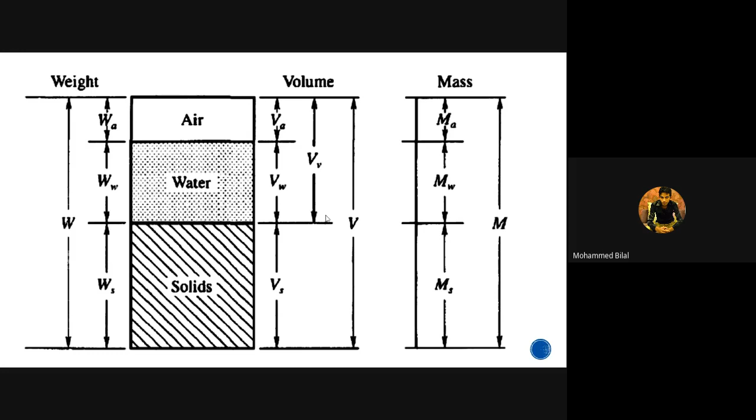So we have derived a few interrelationships between the base properties also. The base properties in the sense which we directly derive from the phase diagram, and the interrelationship means the derivations or the formulas which are derived using two or more base properties. So that is called as interrelationships. So we have derived some interrelationships also.

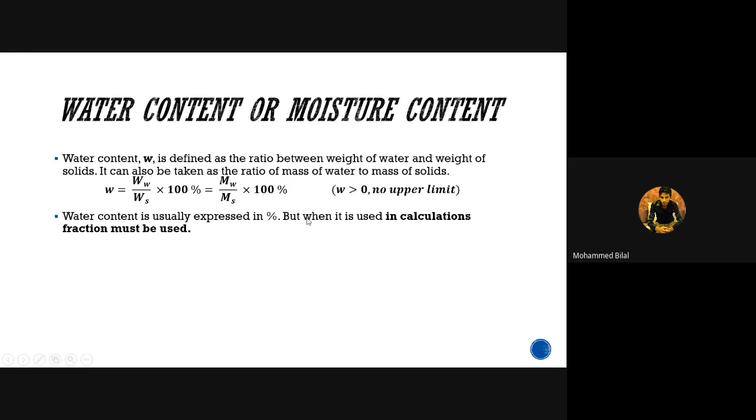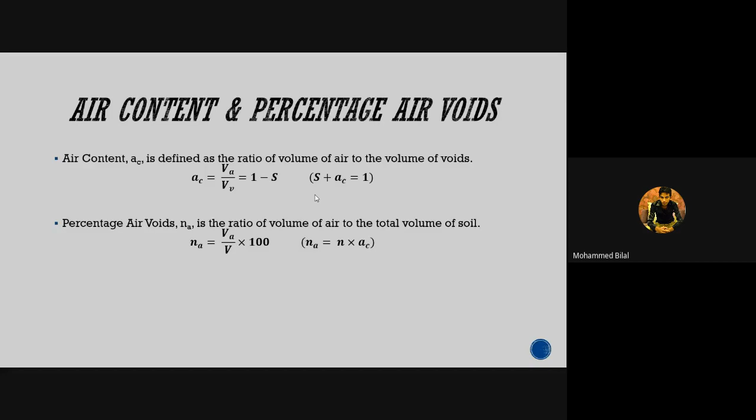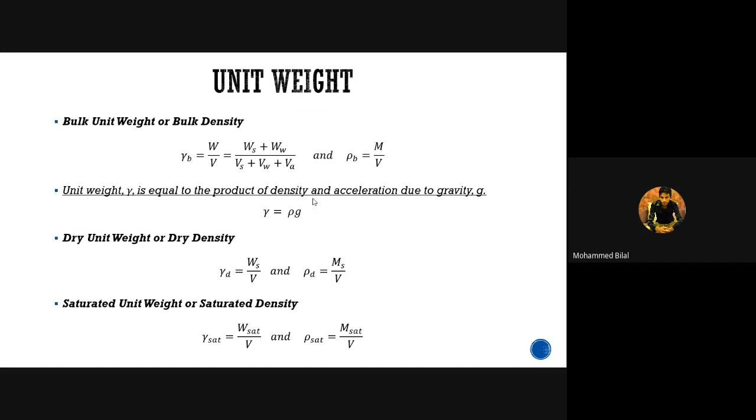So the base properties which we were discussing were water content, void ratio, porosity, degree of saturation, air content, percentage air voids. All these fall under the volumetric relationships category. And the rest we saw the weight relationships or mass relationship category. In that we saw the unit weight: bulk, dry, saturated, submerged, and finally the density of solids.

So the first four represent the unit weights of a soil mass at different conditions. And the last one, this unit weight or density of solids, represents the unit weight of the solid particle alone. So we are not considering the weight of the water and air present in this density of solids property. So please be clear with the difference between these properties.

Bilal sir, your voice is breaking, sir. Okay, sir. One sec. Sir, can you hear me now? Hello? Yes, sir. Students, all of you clear with sir's voice? Yes, sir. Okay, thank you. You can start, sir. Okay, sir, sure. If you have any difficulty in the voice clarity or anything, please stop me there and intimate me. Then only I can check. Okay, thank you. So let's proceed again.

So one thing we have to be cautious about this unit weight is for any other material, say for example, we take concrete or steel or water or mercury, these are the common materials we discuss. You may have come across them during your previous semesters. When we take fluid mechanics, you could have discussed the unit weights of water, oil, and mercury. In fluid mechanics lab, we usually use mercury. That's why I included that here, even though it is not a construction material.

We have seen some important interrelationships between different properties, and where we have utilized these properties. Now we can move on to the next problem, some other types of problems in this topic. In the previous class, we saw a problem where a soil's weight in wet and dry condition was given, and the volume was given, and we calculated these many properties in that sum.

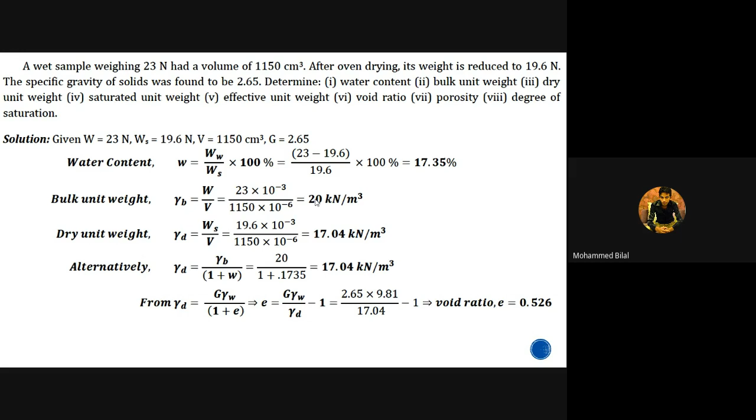Don't expect that the property name will be given in the question. Sometimes it may be given with only the symbols of the property. So small w represents water content or moisture content, both are same. Don't get confused that w may be representing weight; it's not like that. So small w represents water content here, 14.6%.

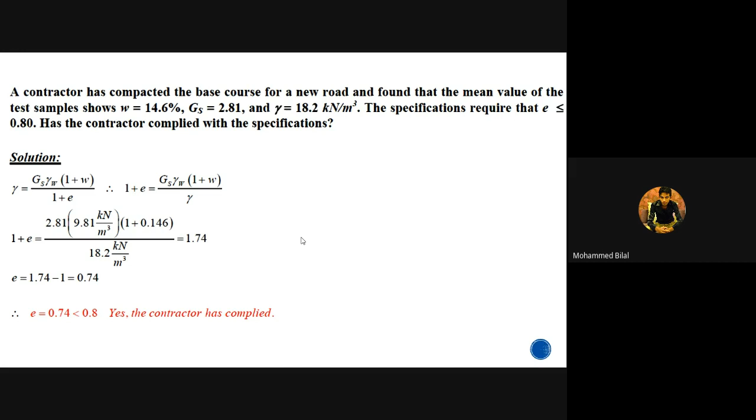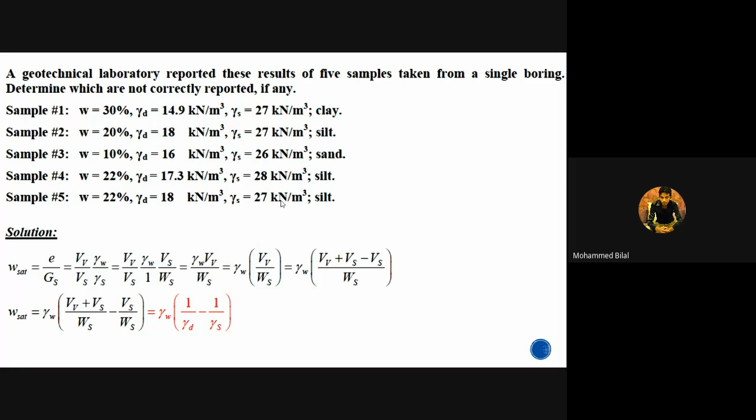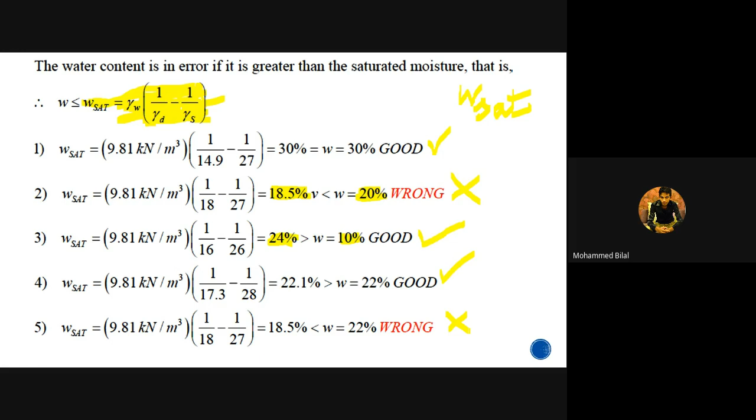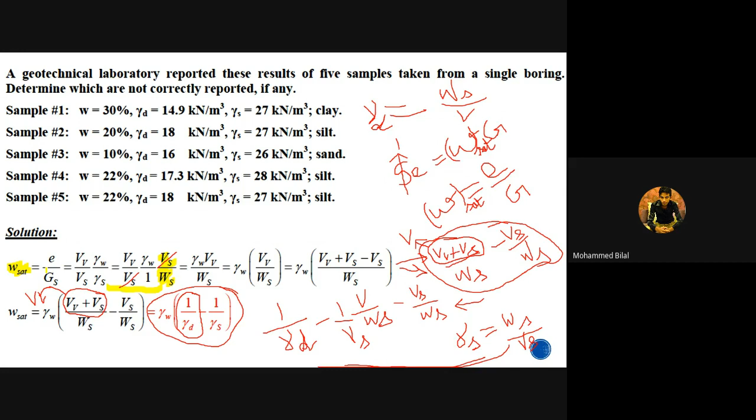So don't expect that in the first unit or in the phase relationship chapter we are having 25 formulas, and if I mug up these 25, I can answer any sum. Don't think like that. In this particular sum, you have seen that we are deriving a very new term here, water content at its saturation state. Sometimes you can get problems like this. That is the difficulty level of GATE exams or UPSC exams for that matter. Okay, right. Let's move on to the next one.

We have got so many questions in this particular sum. So much data is given, and we are asked to solve so many properties here too. So let's write it one by one. We are separating the given data into two portions. We are dealing with this sum in two different locations. Location one is the borrow pit, from where we are collecting the soil to build this embankment, and location two is our construction site, where we are going to construct this particular embankment.

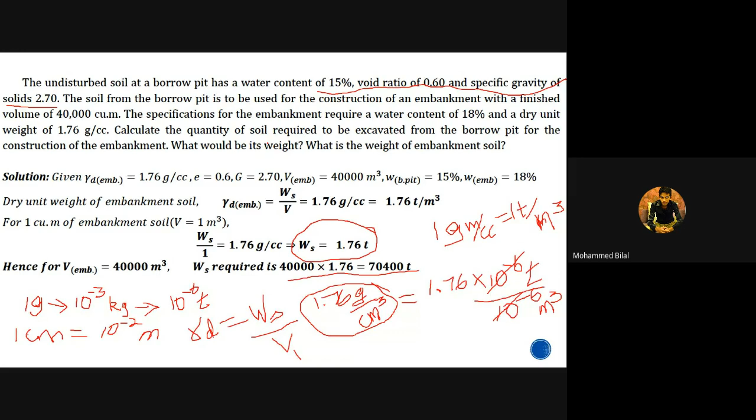So the dry unit weight of the soil in the borrow pit is not directly given. We have to calculate that first. Other properties of the borrow pit were given in the question: the water content of the soil at the borrow pit, the specific gravity of solids, and the void ratio. You can note that here in the question. The unit weight of soil in the borrow pit was not directly given, and hence we are calculating that first.

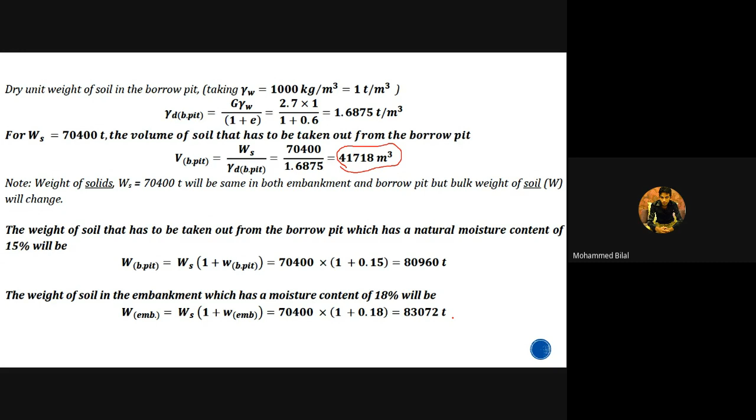Next, we are moving on to the next topic. If you have any doubts in the previous phase relationship topic, you can ask, or else we can move to the next topic. Okay, next topic, index properties of the soil.

Okay, so if we calculate or if we find any value or any property of a material, there has to be a purpose for that. Why we need to do it? Why we need to calculate unit weight? Why we need to calculate void ratio? There has to be a purpose for that. Similarly, index properties of soil, and we are going to discuss a few properties of soil in the next few slides, and we are going to collectively call those properties as index properties.

Why the name index? You can see in our record notebook or in a textbook, we have index in the beginning of the book. So what is the purpose of it? Index helps us to locate the content of the book or identify the content of the book, where it is. Similarly here, this bunch of properties which we are going to discuss in the next few slides,

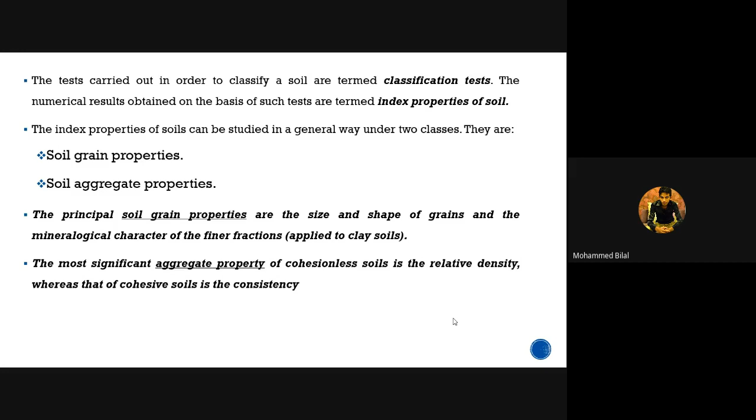So the most significant aggregate property for cohesionless soil is its relative density. So far, we have discussed bulk density, dry density, saturated density, submerged density, and all. And this is one new term, relative density, so we will discuss what it is. And for a cohesive soil, the most important aggregate property is its consistency. In the next slides, we are going to see all these properties.

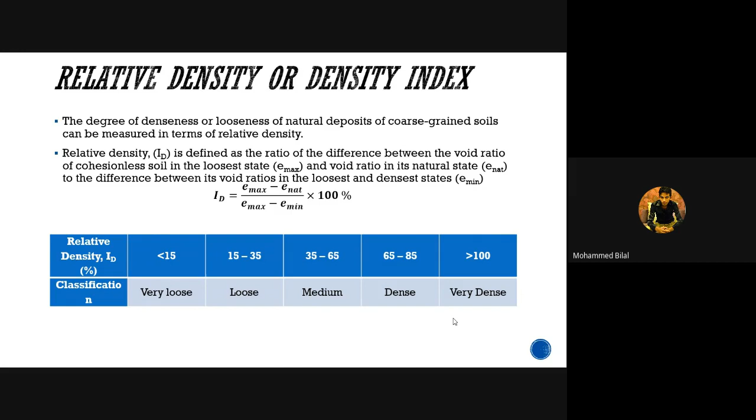From the relative density results, we can classify the soil into 5 categories. If the value is less than 15, it is very loose soil. 15 to 35 is loose soil. 35 to 65 is medium. 65 to 85 is dense, and 85 to 100 is very dense.

Next, for cohesive soil the main aggregate property is consistency. The consistency of clay soil can be measured using the Atterberg limits. Consistency is a term used to describe the degree of firmness of a soil in a qualitative manner, not a quantitative manner, using descriptions such as soft, medium, firm, stiff, hard, etc.

Okay, right. So what this literally means is with how much ease, or simply how easily we can deform a clay soil. We are given a block of clay soil: how easily can we deform it, change its shape? Using terms like soft, medium, and firm, we can indicate it qualitatively. So that is what we are going to do in consistency.

The physical properties of clays are considerably influenced by the amount of water present in them. So depending upon the water content, 4 states of consistency can be used to describe the consistency: liquid state, plastic state, semi-solid state, and solid state. In between these 4 states, we have 3 boundaries.

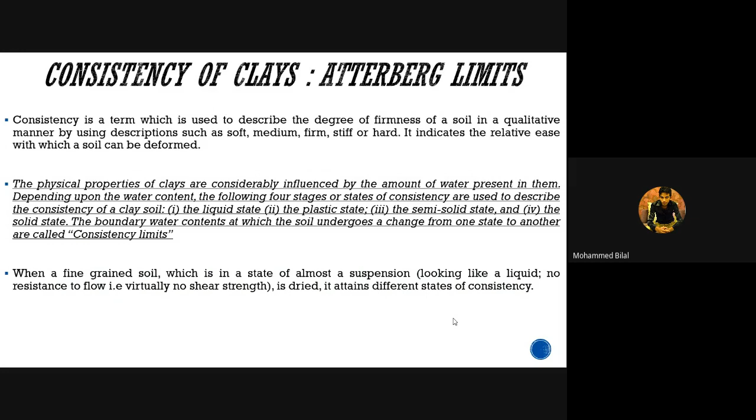From liquid to plastic, we have one boundary. From plastic to semi-solid, we have a second boundary. From semi-solid to solid, we have the third boundary, and we term these 3 boundaries consistency limits. These three consistency limits are simply liquid limit, plastic limit, and shrinkage limit.

When the soil transfers from liquid state to plastic state. Liquid state doesn't mean it is like water. Don't think like that. Liquid state means when a soil attains a tendency to flow. So from liquid state to plastic state, the particular water content at that boundary is called the liquid limit.

From plastic state to semi-solid state, the particular boundary is the plastic limit. From semi-solid to solid state, the particular boundary is the shrinkage limit. These are the three limits.

Or simply, for your understanding, take a soil and add water to it, make that mixture reach a flowable condition. We are adding water in percentages, and at a particular percentage the soil mixture starts to flow; that particular limit is called the liquid limit.

Now we are taking that mixture and reducing the water gradually. At a particular state, the flowable property reduces and it starts to behave like a paste; that is called the plastic state.

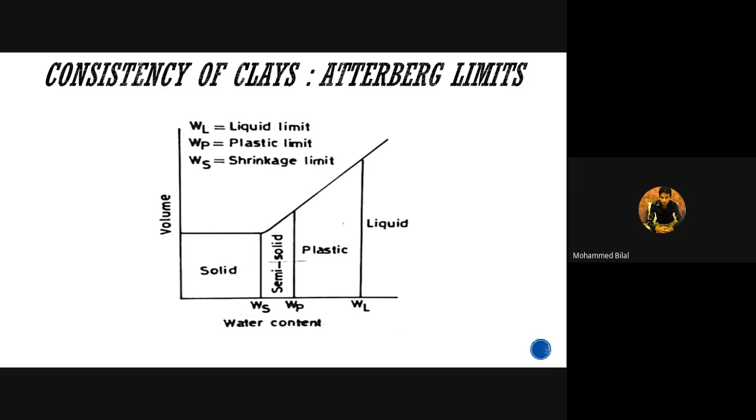Beyond that, if you continuously keep reducing water and you attain the natural water condition, with no more change in volume, that is called the solid state, right? So these are the three consistency limits.

From these consistency limits, we are going to derive some more properties. The first one is plasticity index, which is very useful for classifying the soil in the Indian standard classification system. Plasticity index plays a major role, and we should know how to find it. Plasticity index is the range of moisture content over which a soil exhibits plasticity, behaves as a plastic. That range is called the plasticity index.

It is the numerical difference between liquid limit and plastic limit. From this, we can calculate the plasticity index value: Ip = WL − WP, where WL represents the liquid limit and WP represents the plastic limit of that soil.

Using this plasticity index, just like we did with relative density, we classify the soil qualitatively. If the plasticity index is 0, we call the soil non-plastic. If it is 0 to 7, it is low plastic soil. If it is 7 to 17, it is medium plastic soil. If it is more than 17, it is highly plastic soil.

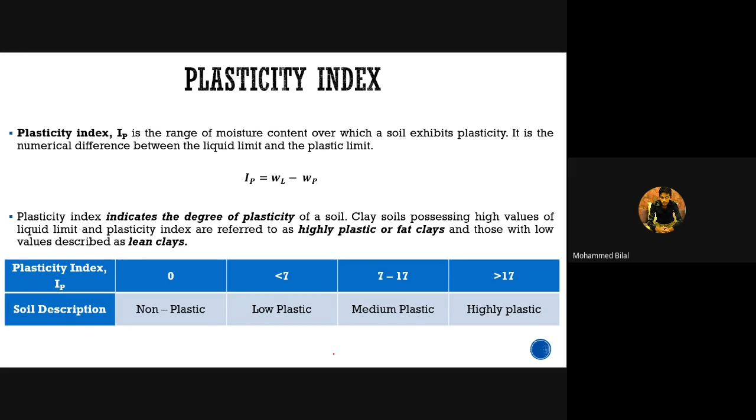These are some other consistency related parameters: consistency index, liquidity index, and flow index. These won't have much usefulness in classifying the soil, so we need not go deep into this.

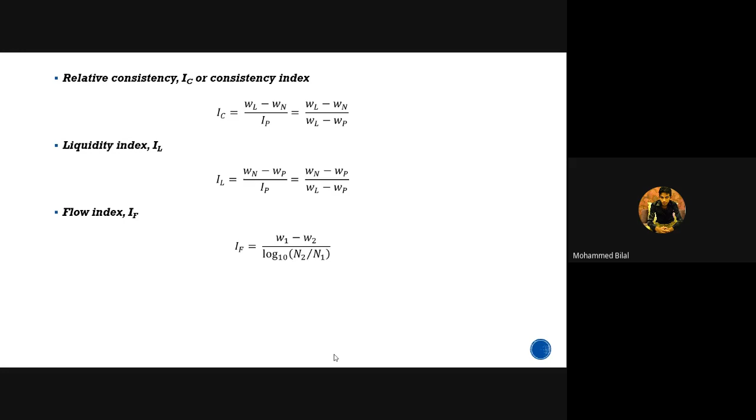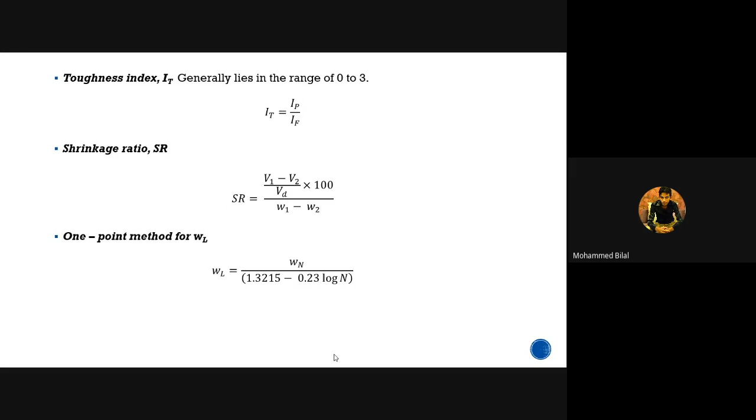There again some more properties: toughness index, shrinkage ratio, and the one point method for finding the liquid limit. The next one is sensitivity. Again, this is also a soil aggregate property. It is the ratio of the unconfined compressive strength of an undisturbed specimen of the soil to the unconfined compressive strength of a specimen of the same soil after remolding at unaltered water content.

What this literally means is, if you take a clay in its natural state and measure its unconfined strength, we will get a value. Now we take that same specimen and remold it. We are mixing it, not adding any water to it, just doing some kneading action, and again we do the UCC test, unconfined compression strength test. We will get a value lesser than the original one, due to the change in structural arrangement.

So when we take a ratio of both values, in its undisturbed state and in its remolded state, we will get the sensitivity. Based on the sensitivity, we can classify a clay into 4 different groups. If the sensitivity value is 1 to 4, it is a normal clay; 4 to 8, sensitive clay; 8 to 15, extra sensitive clay; more than 15, it is a quick clay. So please try to remember these values because you may get questions from this.

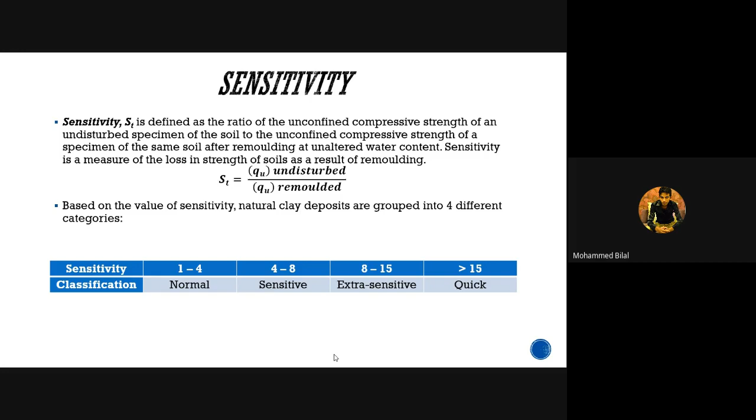Especially in 1 mark questions in the GATE exam, you may get questions from values like this. So what is the sensitivity value for a quick clay? You will be presented with 4 different ranges, and you have to pick more than 15 from that. So please keep that in mind. That is why I'm discussing these values here.

The next property will be thixotropy. Thixotropy is actually the inverse of sensitivity, you can say. In sensitivity, we are disturbing a natural deposit, and hence its strength got reduced. That is what we were studying in sensitivity. Thixotropy is a special property of clay.

If the moisture of a disturbed clay strata is unaltered for a period of time, the clay soil will regain its strength. This property is known as thixotropy. You are disturbing a clay strata and leaving it as it is, not adding any water or anything to it. After a period of time, if you measure the strength, it could have attained some part of its original strength again. That property is known as thixotropy.

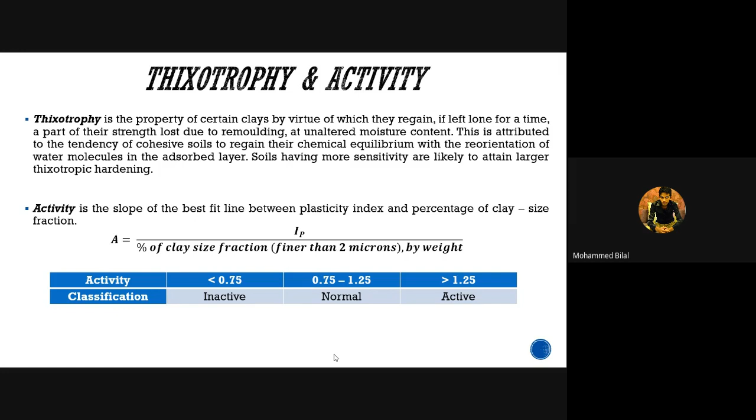Next, soil classification. So what's the time? Okay, in just 10 minutes I will give you an intro on soil classification.

As per Indian standards, ISSCS or BIS classification system, we can call it, because it is published by the Bureau of Indian Standards. ISSCS means Indian Standard Soil Classification System. You can study the entire guidelines in the code book IS 1498-1970. They haven't changed it yet, so the 1970 version is still running. Some reaffirmations are made, but no major changes. So IS 1498.

So this is the code book number for this particular code book. It is actually based on the Unified Soil Classification System. Just like our Indian constitution, which was derived from many constitutions all over the world, this IS soil classification system is also derived from the Unified Soil Classification System, we could say.

In fact, we have kept the USCS as it is, and we have made only one change in it, and we just renamed it and said it is a full new one, but it's not the case actually. So we have made only one change to the USCS system, and we are calling it the Indian soil classification system. That's not a problem.

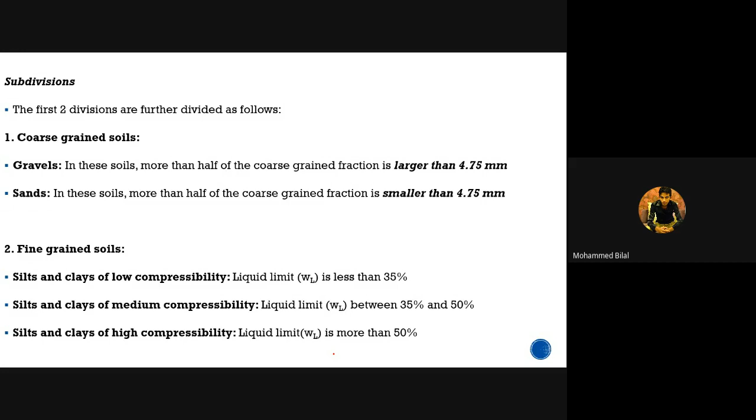So again, these subdivisions are further divided into small groups. The coarse grained soil, that is sand as well as gravel, is again grouped as clean and dirty. How we term this is by the percentage of fine grained soil present in it. Using that, we will term whether it is clean or not.

For example, if you take a mixture of sandy soil, and we can predominantly see sand in it, but we can also see a major chunk of it as clay soil, then the soil is not clean. We will discuss the percentage in later slides. So if that is the case, it is not clean.

And if you take the mass of a sandy soil and it has only sand grains in it, and you can't see any visible matter in it, then you can call it a clean soil. But actually we don't do it by visual examination; we do it by conducting some tests, which we can discuss in the next slides.

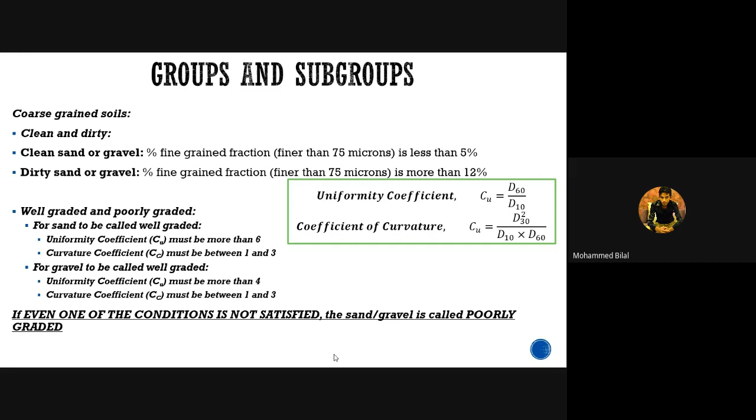So next, for fine-grained soils, we will deal with the consistency values. In that, we will be focusing on liquid limit and plasticity index. For finding plasticity index, obviously we need to know the plastic limit also. Shrinkage limit will not be useful for classifying a soil, so you don't need to worry about that. Even in the field, please keep that in mind. For classifying a soil, we need only liquid limit and plastic limit. We don't need shrinkage limit.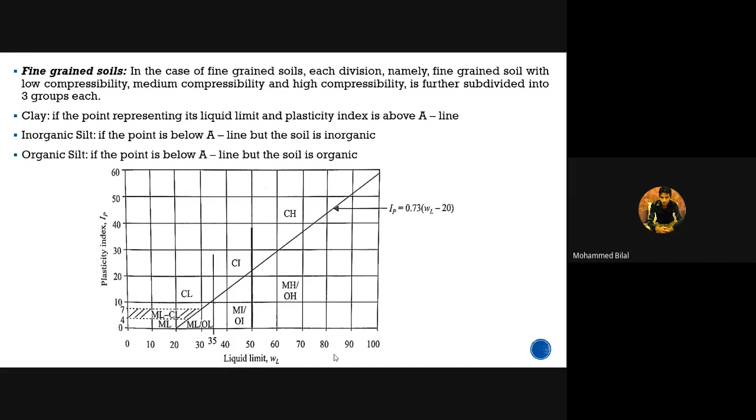So using Casagrande's chart, we will classify whether the given soil is a clay or a silt. Next, these are the prefixes and suffixes of ISSCS. In the Indian Standard Soil Classification System, we finally term a type of soil using two letters. In some special dual classification categories, we term a type of soil with four letters, two pairs separated with a hyphen.